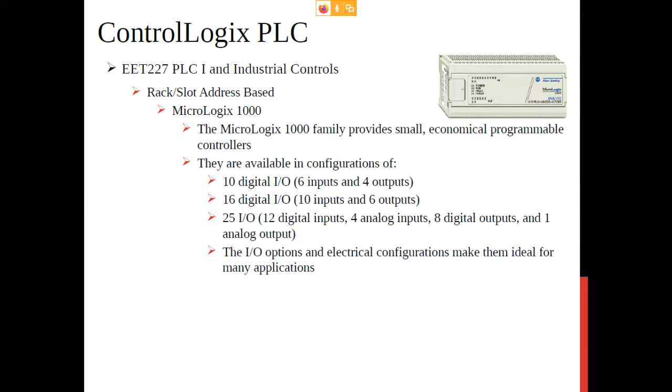And the other thing is, they actually used a rack slot sort of address spacing on them. Okay, and the MicroLogix were just like rack 0 because you couldn't add a rack to those. The SLC 500s, a lot of times people called that the Slick 500, and I don't know what happened to my image up there, but those processors were kind of like the core Allen Bradley before they moved to the ControlLogix model, but they also used a slot referencing.

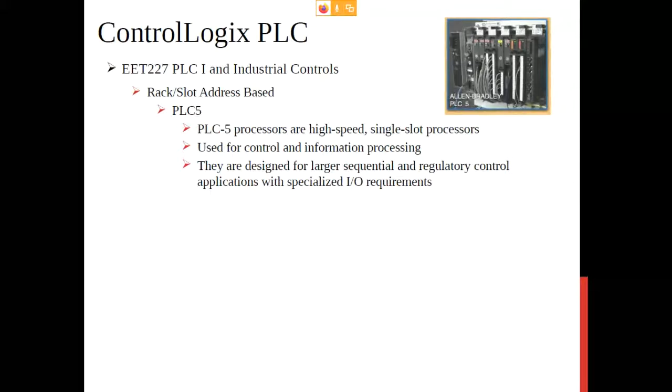Okay, and then the PLC5 was a really old style. They used a rack and slot address spacing. But some of these are still in use. The PLC5 model was late 80s, early 90s kind of time frame when they were new. But once you put something in place and it's working and it's making money, you don't change it, right? You don't change a production line just because somebody made a brand new PLC. If the line's still running and it's still making money, you're not going to shut it down, because anytime you shut down the line, now you're losing money you could be making. So there are a few of these still around and still in production.

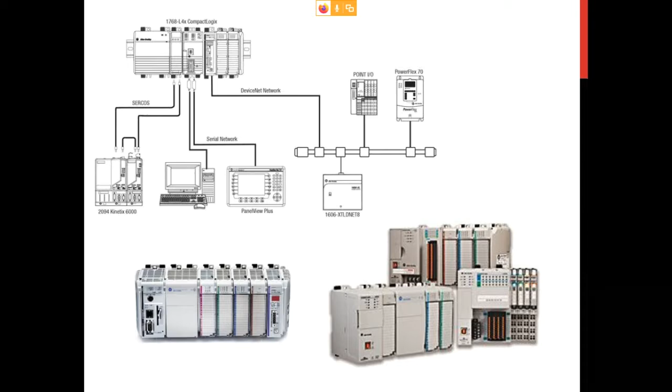Now the CompactLogix, which you used in PLC1, along with the ControlLogix, which we're going to also work a little bit with this semester, these use what's called tag-based. So you create a tag, and you assign that tag to the I/O on there. All right, and so these are expandable. So you can add modules to them, and of course we have 2 modules on the ones that we have in the classroom.

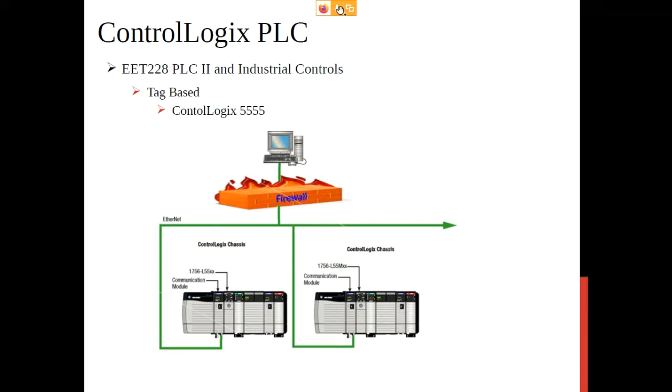All right, the ControlLogix use a chassis called the 1756 chassis. The CompactLogix use a 1769 chassis, but the ControlLogix use a 1756 chassis. So this is the 1756 chassis here.

This is one we had in the classroom, and you can see there I kind of labeled the PLC, and then there's actually 4 slots that don't have anything in them. So next to the PLC there, we actually had 4 slots with nothing in them, and then there were some more slots there, and so this was actually a 17 slot chassis. Okay, so the ControlLogix come in different size chassis. I think I say that somewhere on here.

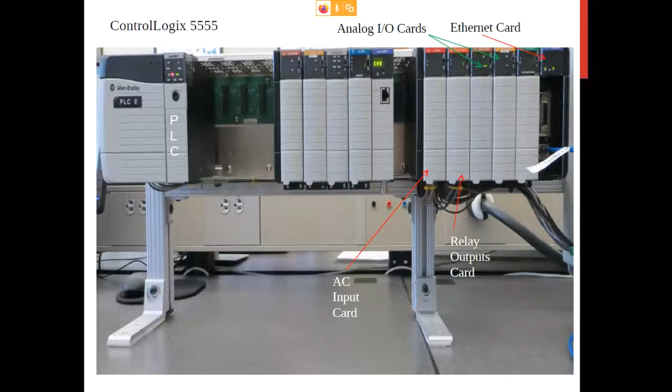We'll get to that, but they could do 4 slot, 7 slot, 10 slot, I think like 13 slot or 17 slot chassis. All right. Whereas the CompactLogix that we have in the classroom, you can only add, I think, 3 modules. We have 2 added, but I think they can only handle like 3 modules. Now, some of the other models of CompactLogix can handle more, but they certainly can't go all the way up to 17.

All right, so now when we communicate with these, of course, we're going to be using our standard Ethernet cables. We talked about those in the last lecture. If you're plugging from a laptop directly into the PLC, you need to use a crossover cable, which would have a 568A on one end and a 568B on the other. But if you're plugging the PLC into a switch and the PC into a switch, then the switch basically does the crossover for you.

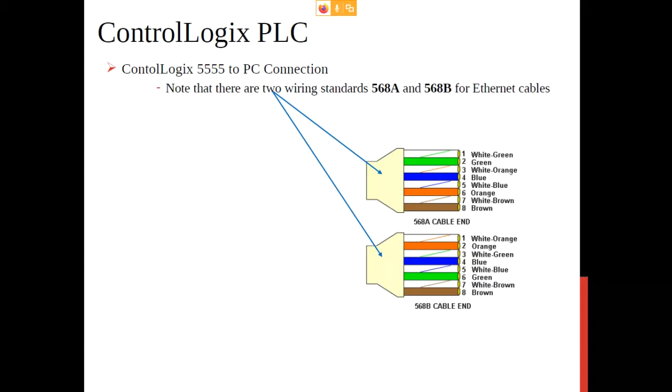So you would just use straight through cables. So you'd either have a 568A on both sides or a 568B on both sides. That would be a straight through. And again, the switch does the crossover for you. That's one of the things that it'll do.

All right, so to connect to the ControlLogix, and this is kind of a refresher because it's pretty much the same thing whether you're connecting to a CompactLogix or a ControlLogix. So when you open up the software here, if you open up RSLinx, since we're connecting across the Ethernet, there's 1 of 2 drivers we could use. One of them is called EtherNet/IP, for that industrial protocol we talked about in the last lecture. If you're on the same network, it works really well.

But our PCs are not on the same network that our PLCs are on. So we go to Communications, Configure Driver, and then we're going to choose Ethernet device, not EtherNet/IP. EtherNet/IP works really quick if you're on the exact same network, and then all the devices on that network just pop up, which is really nice. But for us, we're going to create an Ethernet device. I like to label mine the PLC network, because that's where the PLCs are at.

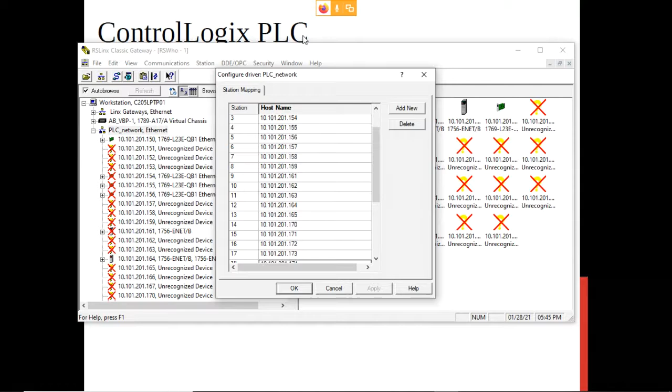And so if you look right now, you can see several of these are on here. Now to configure this driver, you come over here and say configure driver, and you can list all of the IPs in one shot. What I did was I did this ahead of time and added the IP of all of the CompactLogix PLCs and all of the ControlLogix PLCs, and I even have some other devices listed here. And so you can see these are just showing up here.

The ones that are green are actually plugged in. And the ones that are red, they're not plugged in or powered on, or they're not on this network, one of the three. So you can see here that this 150 is plugged in. This is a CompactLogix PLC, right? We can see that by looking at the backplane. Remember, I just said it's a 1769. That is the chassis of the CompactLogix model of PLCs.

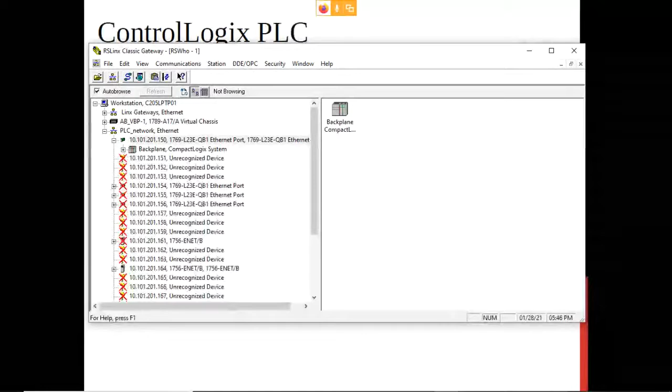What's nice about the RSLinx software here is that you can see what inputs and outputs are available. You can see there's the local bus adapter, but then there's 16 high-speed 24-volt DC inputs, and these are embedded into it. So we can't actually remove this. It's not a module that can be added or removed. It's embedded in there, but it's classified as module 1. And then there's a second module which has 16 24-volt DC outputs, which are sourcing outputs.

If you remember from PLC 1, if you have a sourcing output, the device you're outputting to needs to be a sinking device. If you have a sinking output, then the device you're connecting it to must be a source voltage. And the same for the inputs, you need to have either sinking or sourcing. But you notice this one doesn't say sinking or sourcing, and the reason for that is you get to choose that when you wire it up.

So when you wire up these inputs, you can wire them up as sourcing inputs, and then you would have to wire them into a sinking sensor. Or if you have sourcing sensors, then you would have to wire them up so that your PLC was a sinking device. Okay, so that's why it doesn't say source or sink on the inputs, because it's your choice based on how you wired the device up.

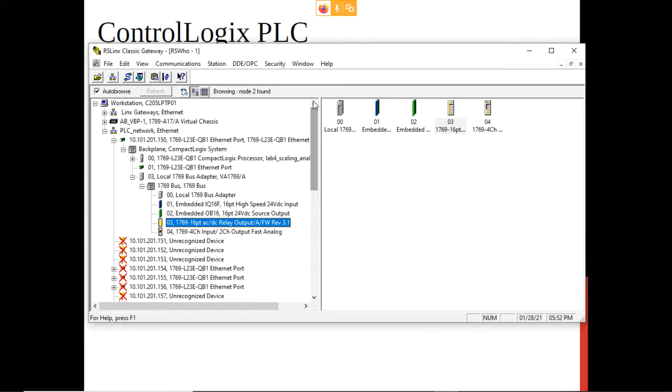Now, what I want to point out to you here, this is an OW16. And if we come back up and look at this guy, he had an OW16. I guess it didn't actually say OW16 there, but it is actually an OW16 relay card. But this one here is a 1769 module, so it won't plug into the ControlLogix. It plugs into a CompactLogix.

They're actually the exact same model as far as the circuitry, because they're both OW16s, but the way they plug in differs. This one plugs into the 1756 ControlLogix chassis. So even though they both have 16 relays and they're effectively identical as far as what they do, they're designed to plug into a different chassis.

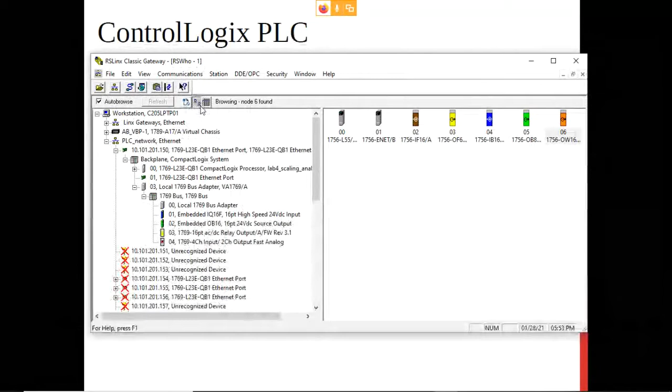All right, so we can see that again in this RSLinx software. And it's very helpful because when you go into the RSLogix 5000 software, okay, good, it activated this time. Last time I opened it, I wasn't connected to the network and it was giving me an error. Anyhow, when you open up RSLogix and you create a new program, see, the difference is this is our communication tool. So this sets up the communication between our PC and the PLCs, okay?

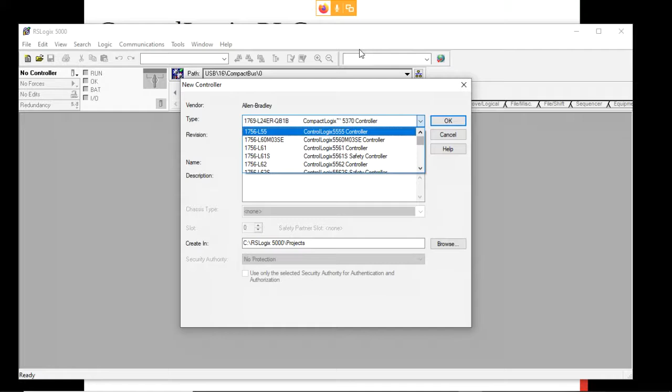RSLogix 5000, on the other hand, is programming software. And so if I come over here and say I'm going to create a new program, now I have to decide what controller am I going to write to. And so if I want to go to the L55, which is the ControlLogix, then you choose that. Now, if you do that, you notice we have currently installed 3 revisions, but 19 and 20 are grayed out. I can't select those, because the ControlLogix don't use those revisions.

And so if you have to install the software on your laptop or your desktop computer and you're trying to install RSLogix 5000, you need to know which revision or revisions you're going to be using. Our ControlLogix controllers are actually a little bit on the older side, and they only use version 16. Now, they do have newer ControlLogix controllers out there. We just don't have them in the classroom. So the ones that we have in the classroom only work with revision 16. That's the L55. One of our ControlLogix is an L61. So it's a little bit newer than the 55, but it still uses revision 16.

All right, and then we would create a name for this. Not sure what name to create here. I'll just call it ControlLogix example. And then you can put in a description. It's a really good idea to put in a description here of what your program is for. But this is what I wanted to show you here. See, here are your different choices. So you can get a 1756 4 slot, 7 slot, 10 slot, 13. I think I said 14. It's a 13 slot and a 17 slot. They also have kind of a special one, which is called the XT chassis, that you could purchase.

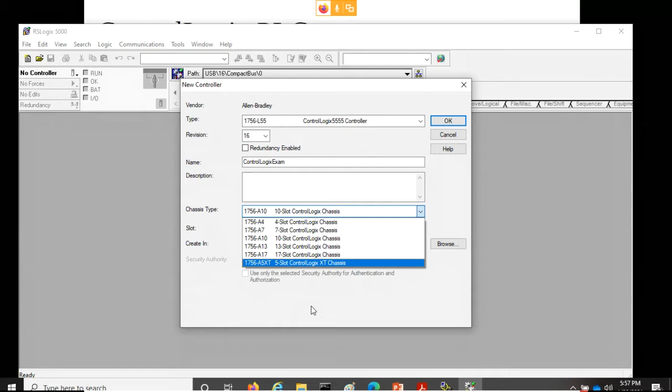Now, in the classroom, we used to have all 17 slots, but as you saw from that one picture, we weren't using half of the slots. And so we actually ended up getting 7 slot chassis. So we have 7 slot chassis, and we have one that's a 10 slot chassis. So you have to look at the one that you have and see which slot it is. Now, you can either look at the chassis, look at the PLC and count, or you can also look at RSLinx, because it's already communicating with it. And so I can clearly see here I've got 7 slots. I got the PLC in slot 0, and then I got 6 more slots. So I'm using the 7 slot chassis, so I'm going to choose the 7 slot chassis here.

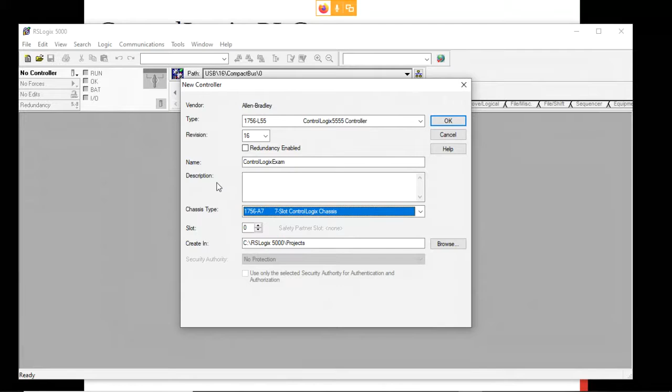And then I need to know, where is the PLC? Is the PLC in slot 0, slot 1, slot 2? You've got to know that. Again, you can look at RSLinx or look at the actual PLC and figure that out. It's visible. But when you put it in here, you need to tell it, hey, my PLC is in slot 1 or slot 0. In the classroom, they should all be slot 0.

And then you can decide where to put your files. Now, it likes to put it on the C drive. Do not put files or programs on the C drive. You will lose them, because they reboot those computers at midnight every day, and anything on the C drive is wiped. So make sure you put it on the D drive or some other drive, okay? For me, I'm actually using a laptop right now. I'm not in the classroom. So I can put it in here in the users, or I could browse. You could put it on a flash drive if you wanted. Okay, and I'll just put it in here and create that.

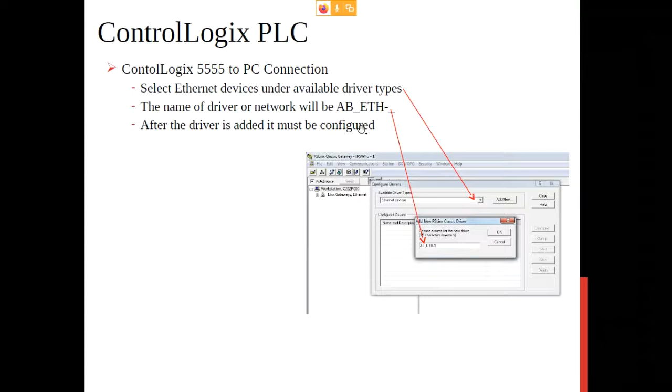I think these slides pretty much show you what I just showed you in RSLogix here. Let me see if I left anything out. Okay, so when you create names, try to be descriptive and say, what is this? So lab 1 is like analog signals. Don't just call it lab 1 or test 1. Those are just horrible, horrible names. You need to make it descriptive so that you have an idea of what it is. So when you come back later, if you decide you want to open it, you have a better idea before you waste time opening it.

All right, so while that was going there then, not sure why it's bleeping at me here.

Okay, so here it's opened up now. RSLogix has opened up, and it's got the controller here. Now notice when you come up to the very top of this tree here, you can go to properties and you can see the controller that you selected, and you can change that. So if you selected the wrong one, you can change your controller. Or if you chose the wrong chassis, you can change it.

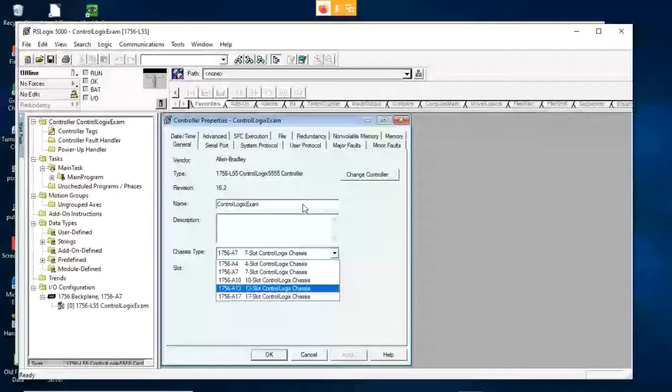Or if you got the controller in the wrong slot, you can change that also. So you can change these after the fact. The other thing is that you come over here, you see faults. So one way to get a guaranteed fault would be if, under general, you selected the 4 slot or the 13 slot chassis or something like that, and you only have the 7 slot, and then you try to download it, it's going to fault.

So what do you do? You come over here to fault, and it'll show you some information about the fault, and then you click on clear major faults, and clear that fault. If you don't clear your fault, that PLC is not going to work. There'll be a little red light on the PLC indicating fault, and you must clear that before you can do anything else with that PLC.

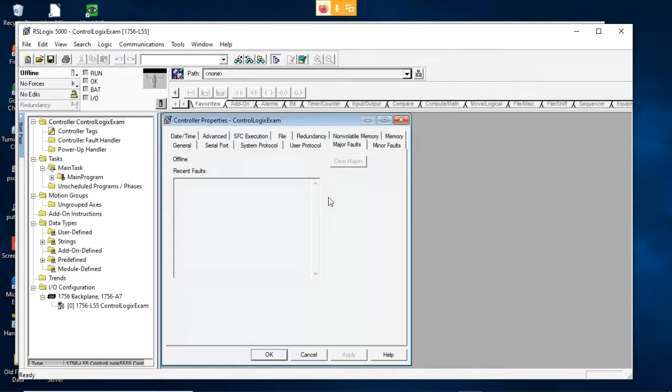So you have to come over here and go online, and then when you're online, you can clear the fault. See, right now it's grayed out because I'm not online. Another way to get a guaranteed fault would be to add a module. So remember down here in IO configuration, we can add our new modules. So I can go to my digital modules and choose that 1756-OW16, which I showed you we have installed. You can add that.

When I add that, it's going to ask me what slot to put it in. And if I put it in the wrong slot, that's another guaranteed fault. So you need to make sure that you select the right slot. How do I find the correct slot? Again, we flip back to RSLinx, and I look and see where's my OW16. It's in slot 6. So I come over here and I set this to slot 6. And this is a relay module, so I can type in relay.

Now, one other thing, please make note of this. If you've got a piece of paper handy, make a note of this so that when you are doing the ControlLogix PLC lab, you must disable keying. I haven't tested this, but I think the problem is, if you look at this, it says revision 3. These IO modules have firmware in them, and if the revision doesn't match, then you will get an error.

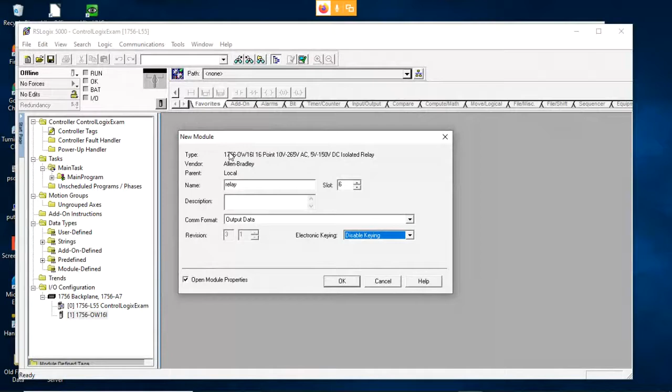Now, again, if you come over here to RSLinx and right click on this and go to device properties, it will tell you that this is revision 2, major revision 2, minor revision 1. But when I selected this, it's at revision 3.1. I'm just going to cancel this and re-add it. So right click on IO config, new module, and relay modules, OW16, are digital modules, so I'm going to look under digital, and say okay here.

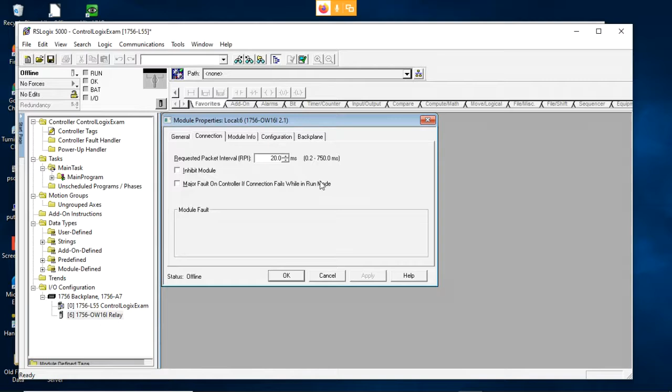And see, now I could have selected the revision here and made it revision 2. And if that's okay, then I probably don't have to disable keying. But if you select the wrong revision, you can still get it to work if you disable the keying, and it'll work fine for our purposes. And remember, that is slot 6. So this is my relay module with 16 relays, and we can then add that. There's not a whole lot of configuration here. Normally we don't have to mess with this module.

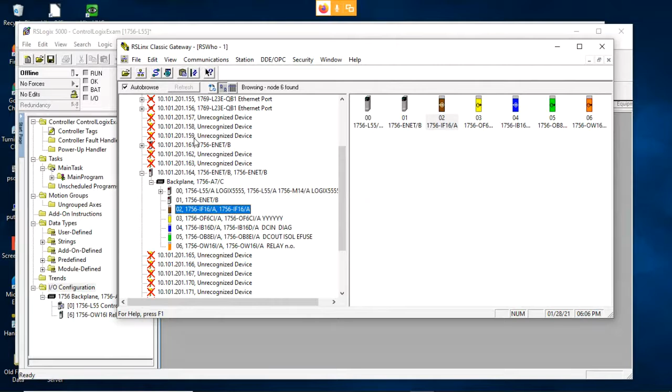All right, but if we wanted to add an analog card, so we're going to add an analog card. Let's go back to RSLinx, and we see, as I already pointed out, slot 2 has an IF16 card. And again, if we do a right click on this and look at device properties, we can see it's actually only revision 1 on there. So it's revision 1,

minor revision 5. So if I come over here, I'm going to say new module, and I'm going to look for an analog card. So I'm going to expand the analog, and I want IF16. And so this is going to be analog input, and it's in slot 2, and it's revision 1, minor revision 5.

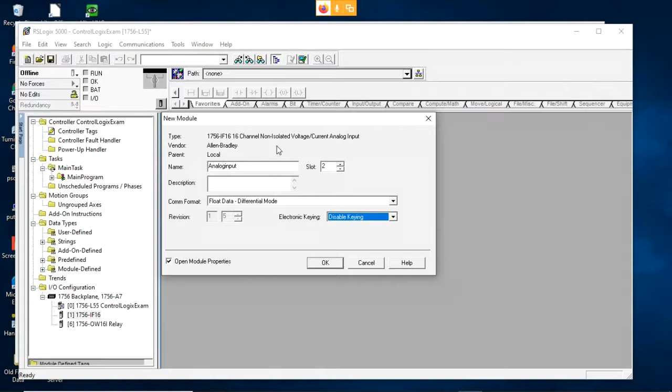So if I take the time to select those, then I probably don't have to worry about disable keying. But I've never actually tried that. But if you're having any problems, make sure you just disable keying and you'll be fine. Now, the other thing I want to point out about this analog module is we talked about inputs and outputs. We talked about binary numbers last week.

And if you choose integer data, then it's going to convert the data as simply integers. But if you choose floating point values, it will actually allow you to kind of scale it on the fly, which is kind of nice about the ControlLogix. The CompactLogix will not let you do that. So these give you a lot more choices. You can select either single-ended mode or differential mode, and I'll come back to those in the slides in a little while.

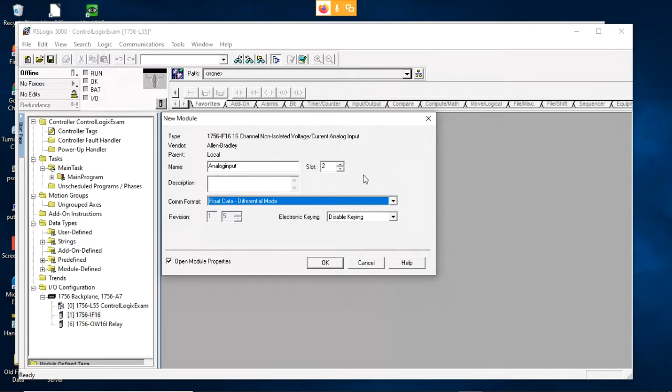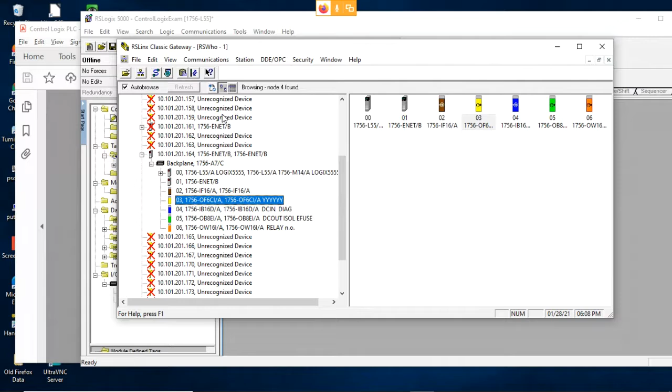So I'm just going to cancel that for right now. But that's how we add inputs and outputs to our PLC. And the reason we have to add them here, if you look at RSLinx, you're like, oh, it knows what I have. No problem, right? It knows that the PLC is in slot 0 and the Ethernet is in slot 1 and the analog input is in slot 2 and the analog output. It knows this because it's talking to the PLC.

But at this point in RSLogix 5000, we're not actually talking to a PLC. So if we come over here and click on Who Active, it looks like a little network thing. And then we can browse our PLC network and connect to that PLC. And so we want to drill down. You need to talk to the PLC. You see how everything over here on the right is grayed? Upload and download, go online and update firmware. Those are all grayed out because I haven't got to the PLC.

When I choose slot 0, now it knows that I'm actually communicating with an actual PLC. And so I select the actual PLC, and then I can download my program. Now at this point, I actually haven't created a program, so it's a null program.

Now I want to make a point here. On the newer PLCs, you don't actually drill all the way down to the PLC. You just choose the main IP here and you're good. So it depends on which model you're working with. If you're working with the ones that we currently have in the classroom, you have to drill down to the PLC. But if you're watching this video and you actually have a newer version of the PLC, you just select the IP address and you're good to go.

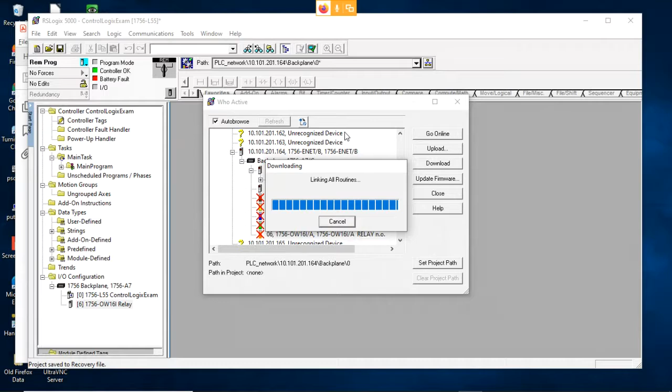Now download means that you're taking the program from your PC or your laptop and you're putting it into the PLC. Upload means you're taking whatever program was currently in the PLC and bringing it up to be able to view it and modify it in the PC or the laptop that you're communicating with.

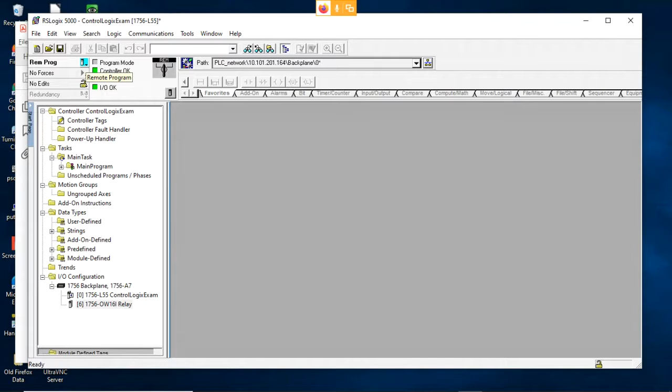All right. Now, the other thing to notice is over here, it says remote program. It's kind of a cyan color. So I downloaded the program, but my PLC is in program mode. That means it's not actually running. It's just sitting there. So if I want to run it, I click on this little down arrow here at the cyan color and come over to run. And then I can change it to run, and it says remote run, meaning that I executed it remotely. And then you can see that it has turned green here.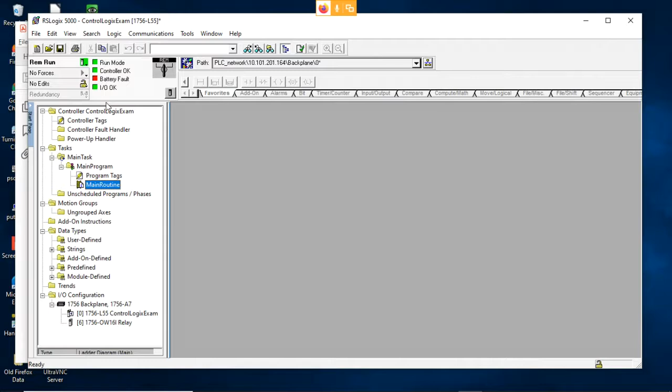And so the PLC is actually running the program. Now again, if we come look at my program, there's nothing there. It's actually not running anything. There's no code there to run, but it's online, and I can actually go back to program mode if I want now. If it was running a program and you switch it back to program mode, that will stop it from executing any program that it might have been executing.

All right, now that I'm online, I'm still communicating. I want to pop back up here to the controller configuration and show you that now I can't change the slot or the chassis because I'm live online. But if I come over here to major faults, if I had a major fault, I could clear it. And if I had a minor fault, which actually I do have, which is because my battery is dead. The PLCs have these batteries in them so that, if they lose power, they won't forget whatever program you just downloaded to them.

So you can see that I do have a battery fault on these. We don't worry about it in the classroom because we're just going to be downloading a new program anyhow, so it doesn't matter whether they remember it when you shut it off. One of these days, I do hope to update the batteries, but we just haven't made it a high priority.

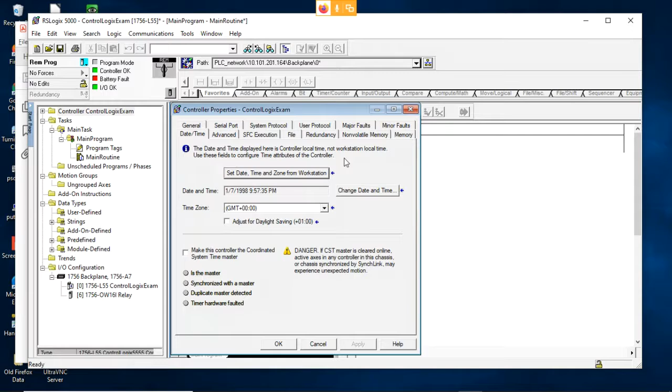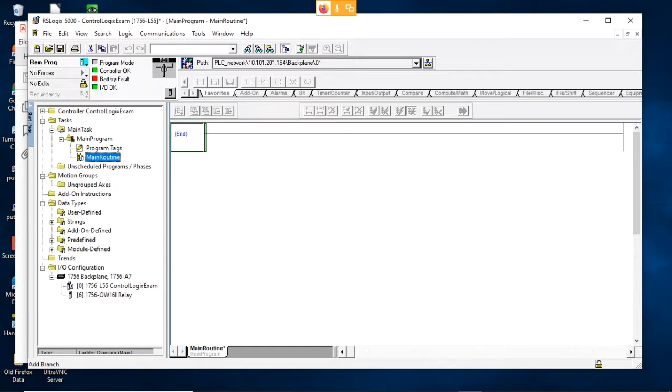You can also set the date and time on the PLC and set some other configuration in here. Now, it doesn't do us any good to do that because the battery's dead, so once you unplug it, time would be lost anyhow. But once we get our batteries corrected, then we can come in here and set the date and time for the PLC and run that. All right. So that's just some general configuration for the ControlLogix.

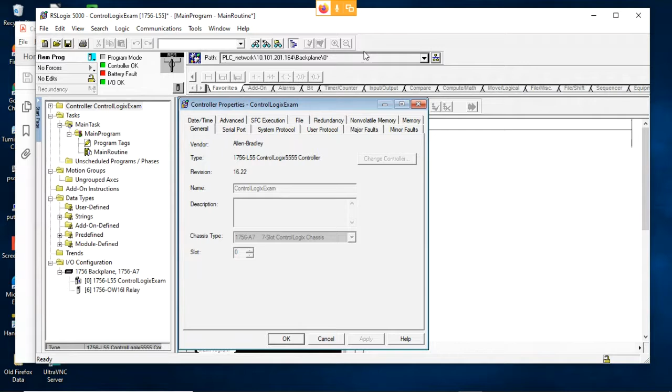Again, it's practically identical to what you were doing for the CompactLogix, but there are a few differences as far as your modules. You have to add all the modules because you don't have any embedded modules. Now, I don't think these guys do it, but some of the newer PLCs, once you connect to them and go online, will actually be able to pull in all the modules that you have. So version 16 doesn't do that, but I believe version 20 does.

I'm going to go ahead and connect to the CompactLogix. So I'm going to come over here now and go to the CompactLogix 1769. And the one that we have is the L23E QB1. I'm going to select version 20 for that because that's the version of firmware that they are set to, so you need to make sure you match that. And so this is just going to be the CompactLogix, and it's going to create the program here.

And then once it comes up, I'm going to connect to the CompactLogix I have turned on, and I'm going to see if it can pick up the I/O. I'm pretty sure that version 20 would grab the I/O. I definitely know with some of the newest versions, you just have to go online and communicate with the PLC.

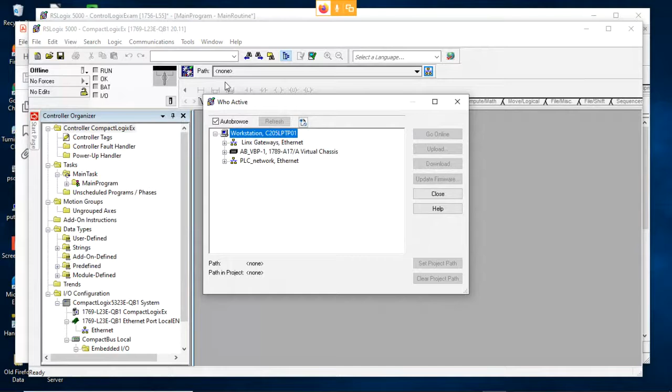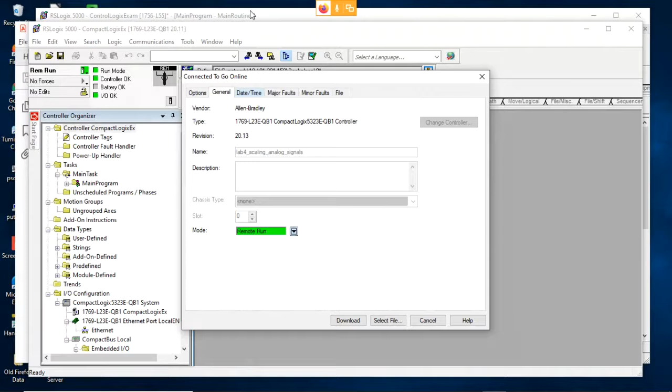Okay, so right here, I'm going to select my CompactLogix. Now again, with this version, I still have to go down to the actual PLC, which is module 0 or slot 0. And then I'm just going to say go online. I'm not going to upload or download, I'm just going to talk to the PLC. And you can see here now that this guy's actually currently running a program. And so it's actually asking me to select a file here.

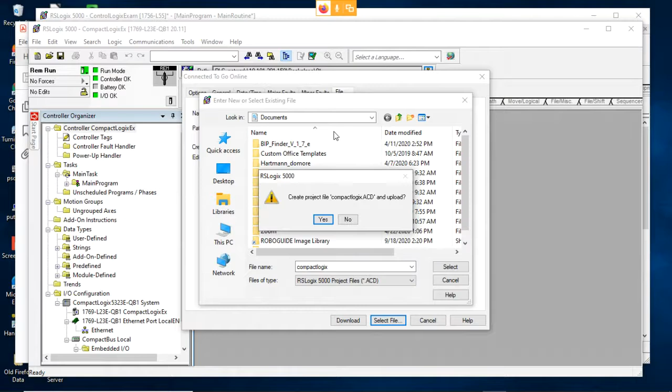And so it's actually going to be uploading the file. Okay, even though I didn't select upload, I just said go online. The first time you connect, you have to really choose either upload or download. And since I didn't select either, it gave me the choice to either hit the download button there or to upload the file that it's currently running.

And so then you can see what... okay, but yeah, here's what I wanted to show you on this. Once you're online with version 20 here, you can actually say discover modules. And so this one will then go through there and scan the modules.

Okay, it's not doing it at the moment, but usually it'll, maybe I probably have to be in program mode or something, but it can actually go in and scan and identify the modules for you on the newer versions, which is kind of nice.

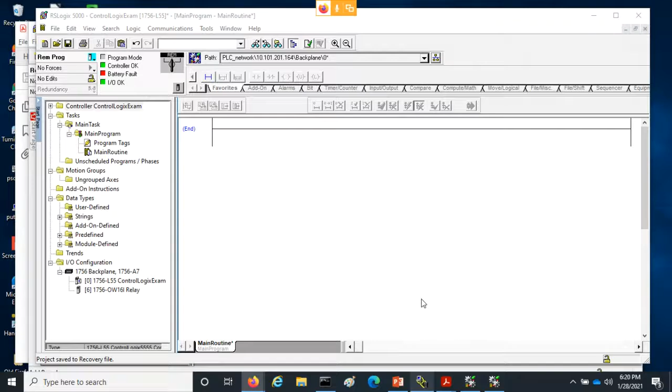Right, but again, we can always flip over to the RSLogix, and the RSLogix is communicating with it, and it will show us what those modules are. Okay.

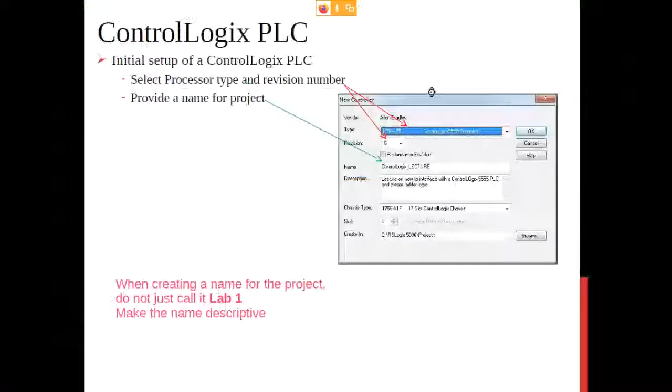All right, so let me flip back to the slides here. This was the slides for the ControlLogix, and I think I pretty much discussed everything that was in here. I'm just going to flip through here real quick. Take your time and review these again, but I'm just discussing the different things.

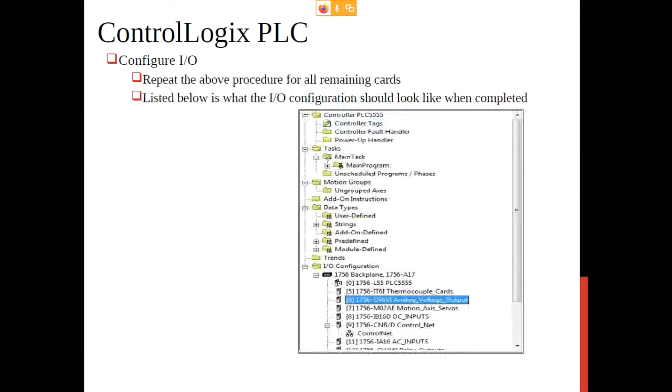So again, remember the electronic keying. You either have to set your revisions to match what the revision is on the actual card, or you can just kind of cheat and disable your electronic keying. So in the classroom, we just normally disable it and don't worry about it. But the electronic keying is important when you set up faults. We don't do a whole lot of that in this class,

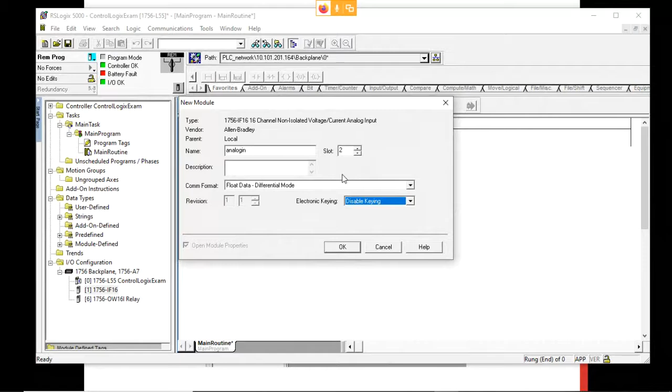but especially when you look at analog inputs and outputs, if I was to come in here and add my analog module, and this was slot 2, I'm just going to disable my keying here, and I'm going to select this, and they're warning you that, yeah, I don't know if you want to disable that. That's what they're saying here, okay?

But of course, now, when you look at this, there's a lot of configuration going on in here. One of the things that we don't really mess with too much in this class because of time, especially for analog modules, they actually have all kinds of built-in fault checking. So your program can address what happens if the voltage goes too high or too low, and you can set what a high or low means.

Okay, so remember, right now channel 0 is set for an analog signal to be between minus 10 volts to plus 10 volts. But we can say, you know what, if the sensor gets above 8 volts, I want you to spit out an error, an alarm. I want an alarm. I want to know. And so you can build that into your program.

All right. And that's when we come back over here and look at the revision. That's when the revision is very, very important, because the alarms and things like that maybe aren't supported in one revision or another, or they made a change. And the other thing is also you can do calibration, to make sure that it's calibrated to your sensors.

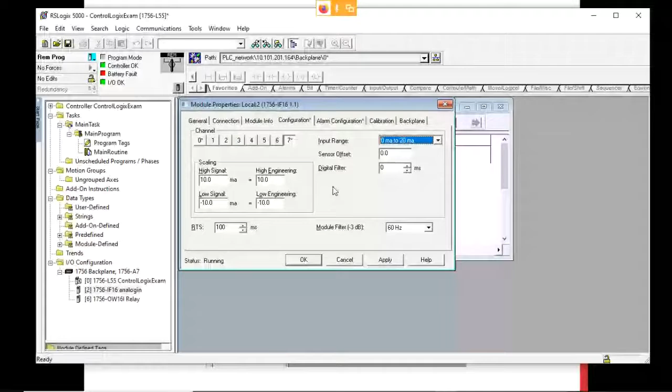All right, now this is the ControlLogix, but if I go over and look at the CompactLogix, I get the same sort of thing. So if I come look at this configuration in the CompactLogix, you not only have to choose what signal you're getting, but you actually have to click on enable. And this is very common in the classroom. People are like, it's not working, and I'm like, pull up your configuration, and sure enough, you didn't even enable it. So if you haven't enabled it, it's not going to work. So you have to enable it.

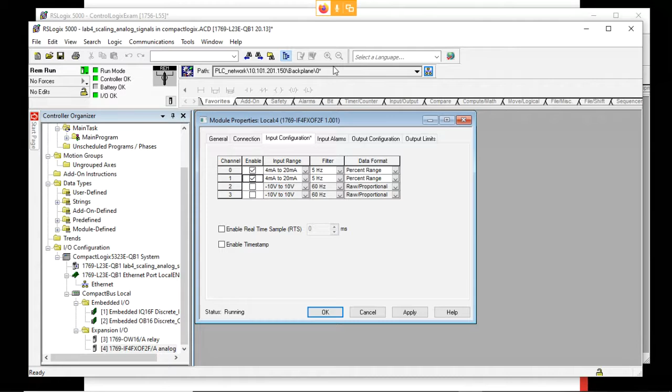Now the CompactLogix card, we actually have one analog card that has 4 analog inputs and 2 analog outputs, both in the same module. So that's why when you read this, you see IF4, that means 4 inputs, and OF2 means 2 outputs. So it actually tells you that right in there. So if you want to use an output, you've got to enable the output. If you want to use an input, you have to enable it, and you have to select whether it's going to be a voltage input or a current input.

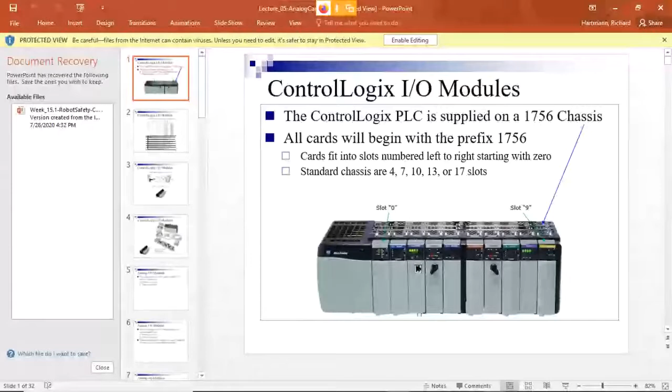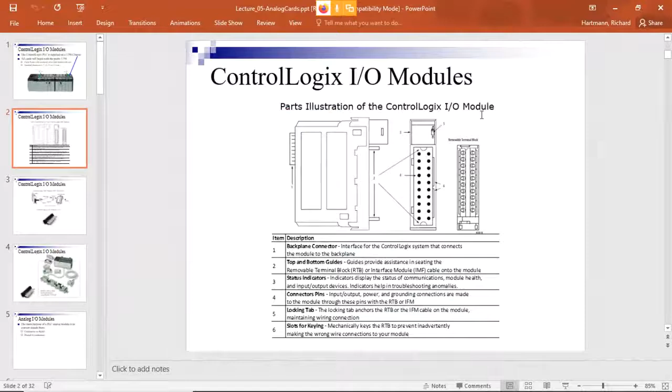All right, so when we look at these modules, I'm just going to kind of go through the slides here. Again, the ControlLogix are 1756s, and we can have 4, 7, 10, 13, or 17 slots in it. And a couple other things to note about these. One of the things that is really cool about the ControlLogix, which you can't do with the CompactLogix, is these things are hot swappable.

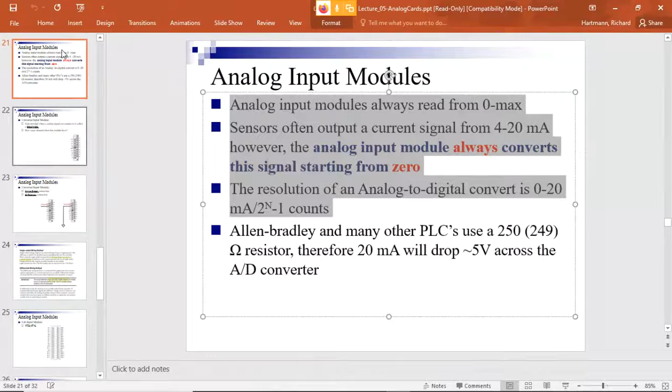I've jumped ahead here. I'm sorry, I know it's in here somewhere. I forget the exact word they use, but it's an acronym, removable under power. Maybe it's in the other set of slides, but it's removable under power. It's like RIUP or something like that is the term that they use. I know I have it in the slides here somewhere.

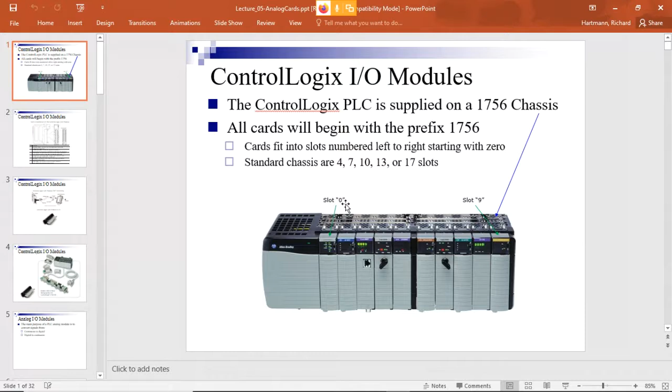This RIUP, I believe, is the way it's spelled, but it means that you can remove it under power. So the beauty about that is that if one of these I/O cards goes bad, you can just pull out the card and plug in a new one. And what's really nice about that, you see this here is a little plastic terminal strip. This little gray piece is the door. You open up the door and it becomes a handle. And you pull this off, and then you can pull out the I/O module without shutting off power.

So that means that you can plug in a new one. So you plug in the new module, push the terminal block back in, and you're back up and running in way less than a minute. Okay, so if the module goes bad, you don't have to shut off anything. You just pop off this terminal strip, slip out the module, pop in the new module, and then push it back. You don't have to disconnect any wires.

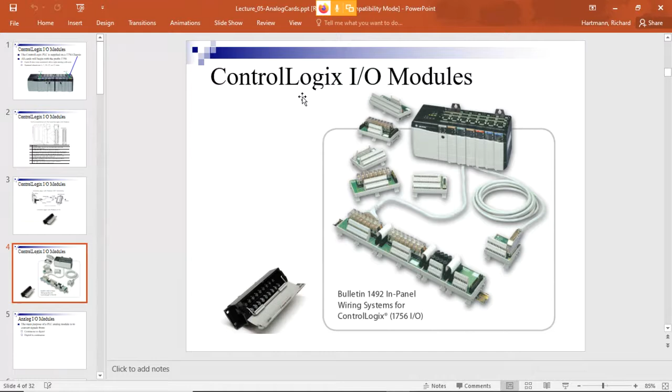You don't have to shut her off or anything. So it's really, really nice for replacing a module. Okay? So it has very minor interruption to the line. You don't have to shut down the line. You just pop that out.

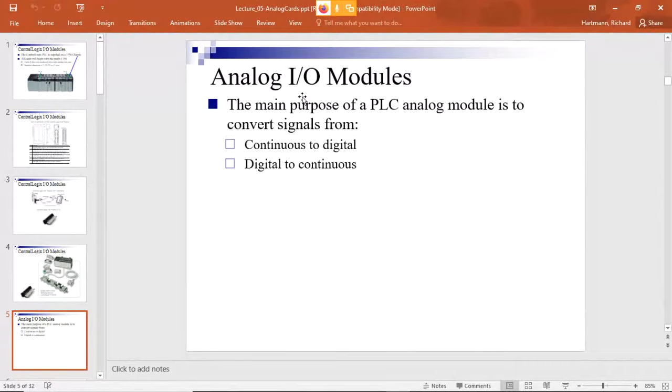All right, so let's look at I/O modules here. So when we have an I/O module for analog cards, we have either analog to digital or digital to analog. So we use the acronym ADC, which means analog to digital converter. Okay, so this would be the analog input card. And outputs are referred to as DACs, digital to analog converters.

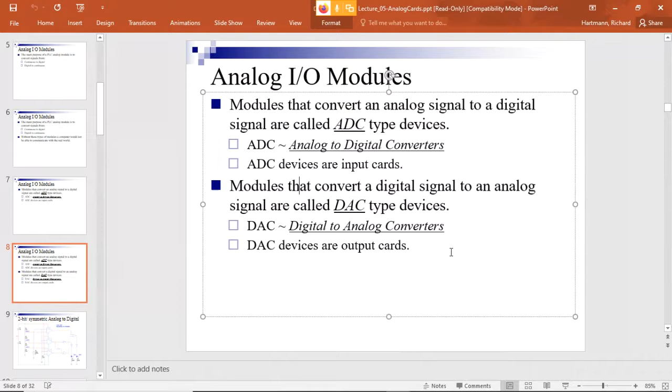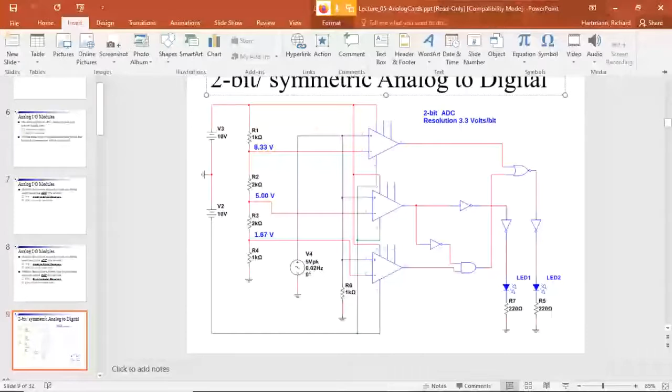All right, so this is a 2-bit converter, and I'm going to have 4 values. So I only have 4 possible values in here. The 4 possible values I have are 0, 0.

I hate it when it gives me a white font. Like, really? Why would I want a white font?

So I have 0, 0, which means that I'm at 0 volts. I have 0, 1, which means... well, the 0, 0 means I'm somewhere between 0 volts up to 1.6665 volts, somewhere in there.

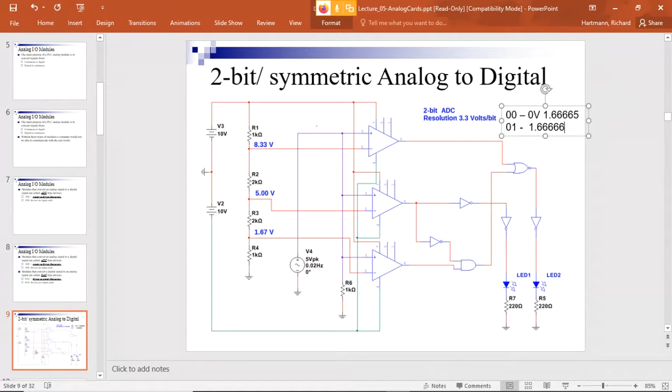And then if I have 0, 1, that's telling me I'm at 1.66666 volts up to 4.999999 volts. And then if I have 1, 0 in binary, which is 2 in decimal, that tells me I have a voltage of 5.00 volts up to 8.3332 volts.

And if I have 1, 1, that means I have a voltage anywhere from 8.33333 volts up to 10 volts, which is the maximum. Okay, so this particular analog to digital converter is a 10 volt converter. It doesn't do minus 10 to plus 10, it just does 0 to 10 volts. That's all this one will do.

All right, but see, these are the values. So if I have 0, 0, then that's telling me that I've got a voltage somewhere between 0 to 1.66 whatever volts. So I'm below 1.6666666. If I have 0, 1, it tells me I'm at either 1.6666 all the way up to 4.999999. If I have 1, 0, it tells me I broke 5. I hit 5, that's the threshold. But I could have 6 volts, 7 volts, all the way up to 8.33332 volts.

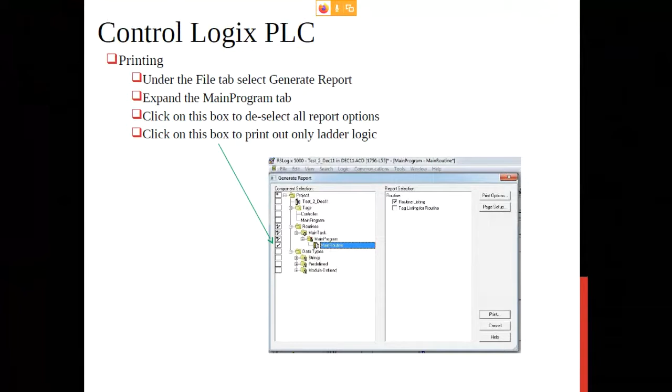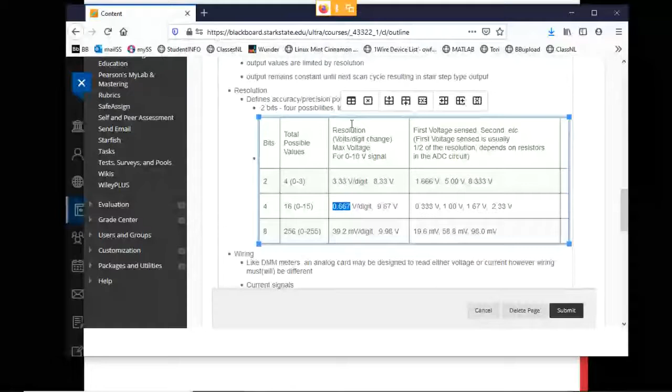If you have 4 bits, and we're going from between 0 to 10 volts in this example, and you can apply the same logic to a current signal, so if you have 4 bits, that means you've got 16 possibilities, which means that you can detect a voltage change of 0.667 volts.

And the maximum voltage you could detect then, instead of being 8.3 volts for a 2-bit, is 9.67 volts. And so the first voltage you could detect would be 1/3 of a volt. But you're going up by 2/3 of a volt. So the next one you would detect would be 1 volt, and then 1.67 volts. Technically the 6 just goes on and on there.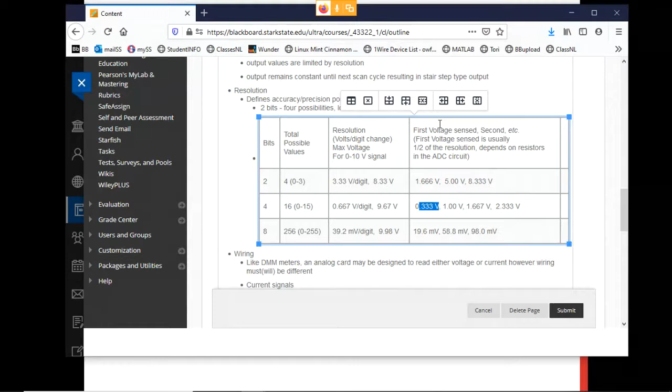But if you have an 8-bit, an 8-bit gives you 256 unique possibilities, which means you can detect 39.2 millivolts. So you can detect a change of 39.2 millivolts. And the maximum voltage you would be able to detect is about 9.98 volts. So the first voltage you would detect is half of this. Notice the first voltage you can detect is half of the resolution.

Okay, don't worry, I'll have lots on the quizzes and exams and things. So if you don't have any, that's great.

They also make dedicated analog input modules for certain types of sensors, like for thermocouples. We'll talk in more detail about those later on, but thermocouples are used to measure temperatures. And so you can buy an analog input module that is designed to read just one specific type of thermocouple.

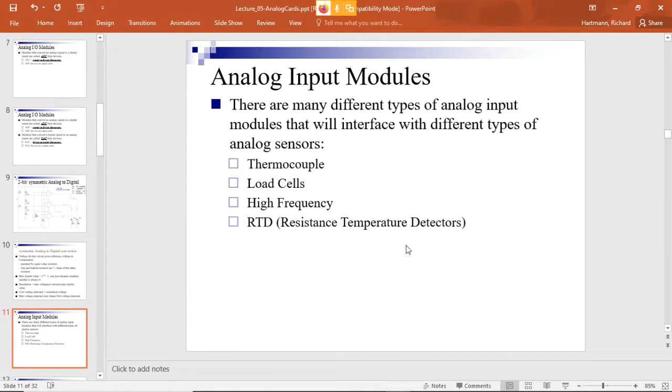But you can actually read 6 or 10 of those, so you can connect 6 or 10 or 12 or however many thermocouples into that one analog input. Normally they're actually a multiple of 2, so 2 or 4 or 8 or 16 or something like that. But they're not always multiples of 2. All right.

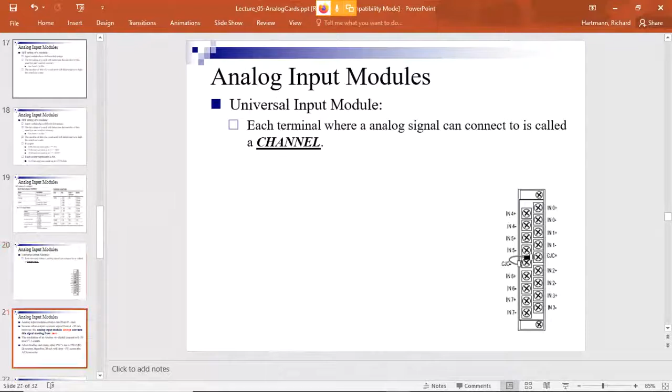Okay, so this is just kind of showing some of those analog modules. All right, now when you wire these things up, you can do either single-ended or differential. And again, I kind of showed you that configuration; you have to know how you wire it up, obviously. And then when you wire it up, you tell it in your configuration right here how you wired it up. Did I wire it up in differential mode, or did I wire it up single-ended?

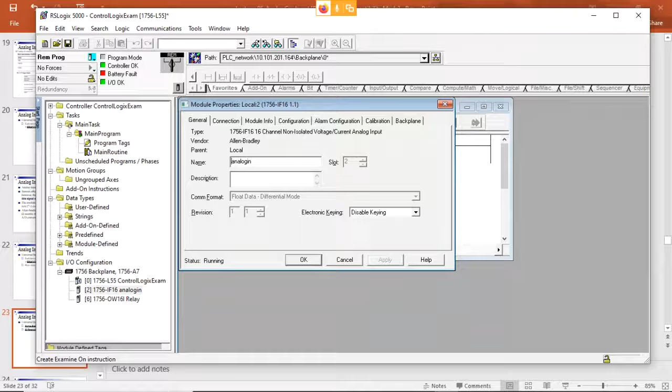All right. So if you wire it up single-ended, then you get full use of all 16 channels, or however many inputs that you have. If you wire it up in differential, you're giving up half of your inputs, but you don't have to share a common ground.

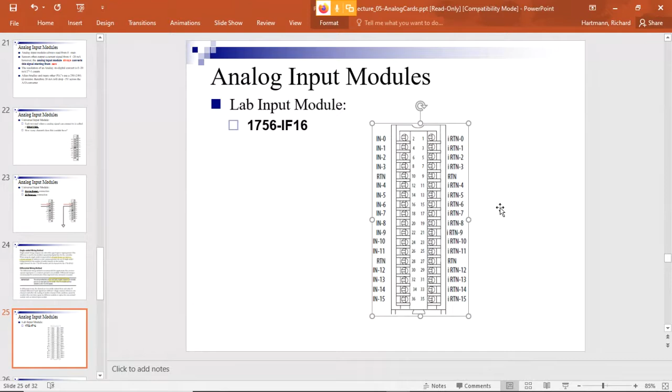All right. And so I kind of show you in here, this was the IF16 input module. And you see it actually has 36 terminals connected to it. Okay, so you have 36 terminals to wire up if you're going to use all 16 inputs. And so this is just right out of the manual here, and they show you how to wire it up if you're doing single-ended mode or if you're doing differential mode.

All right, and so the way you wire it changes depending on how you're using that. So you got to pay attention, read the manual. They're available online. You can download it and get that. But it makes a huge difference on how you wire it, whether you're using single-ended or differential.

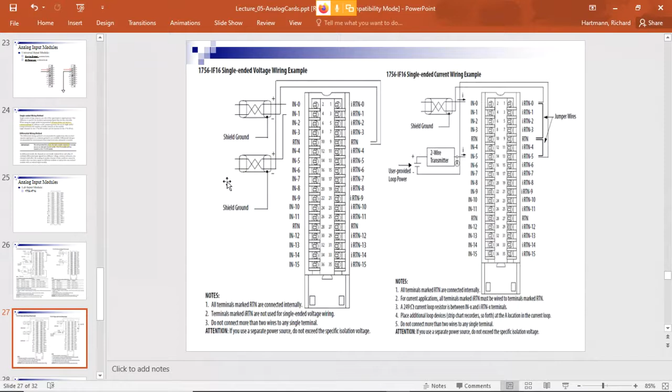Okay, so if you're doing current wiring here, notice you actually have to wire a jumper over here, because this is basically a current. If you're wiring in a current, you got to have the current flow. So that's why you have this little jumper here running from current return, I return 0, that has to then run over to RTN. Okay, but if you're doing a voltage wiring, the voltage wiring is on the left side here, and you don't have to have that return. Okay.

So you have to know, are you actually wiring it up for a voltage input or a current input? And yeah, it makes a lot of sense that, if it's a current signal, you've got to give that current a place to return to. And so there's extra wiring for that. It's just like if you were trying to hook up a current meter.

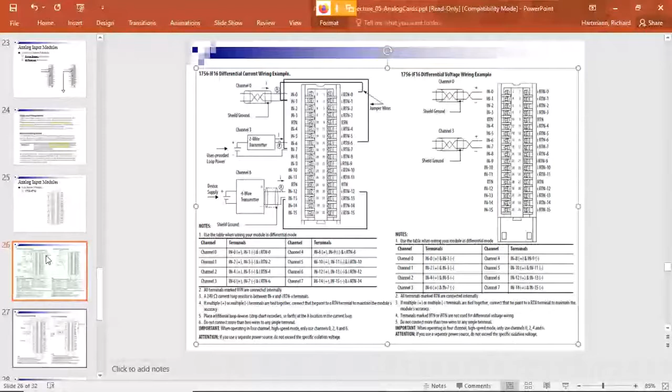Okay, if you're hooking up a current meter to measure current in an electrical circuit, you would wire that in series. But if you want to hook up a voltmeter, you just hook that in parallel, right? So when you wire them up, whether you're doing current signals or voltage signals, it's a different wiring, just like with a DMM. You have to wire it differently for the different type of signal. All right, and so those are in here. You can review that, okay?

The other piece is for output. So remember, the OF6CI is our output card that we have on our ControlLogix. And when you drive a load, they have two different wirings depending on how much resistance is in your load. So if your load is 500 ohms or below, then you wire it up to these connections. But if your load is, this really should say 500 here. I need to save this and re-upload this set of slides because I made a couple changes.

If you're 501 ohms up to 1,000 ohms, then you wire it up to this alternate output. Okay. So you have to know what your load is, and of course you're going to have documentation on whatever your load is. If you're driving a relay or whatever, you need to know what the resistance of that relay is. Or actually, relays are digital. Sorry, yeah, relays are digital. This is analog.

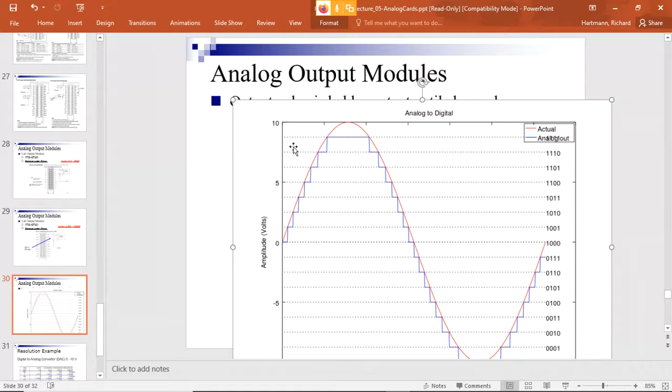the thing is that you're not going to be outputting all the time. So what happens is you're going to put in the output and then you got to wait for the next scan cycle before you output the new value. So you end up actually getting this kind of stair-step output, because it's only going to change at the next scan.

All right, and so that's due to the fact that you're running through the code, you read the inputs. Remember what a scan is. You read the inputs, you execute the ladder logic, and then there's also some kind of system management stuff that's happening there, and then you send the outputs. And so instead of getting a nice smooth curve, you end up getting a stair-step sort of output, okay?

Now, this is for a 4-bit output, so you can see the binary values changing there as we send the output. But if you had a 32-bit output and you had a faster thing, then it might be a little bit smoother. But you're still going to have a stepping sort of change at every scan. Okay, and it could be drastic.

I mean, this is actually showing fairly nice, smooth steps, but in reality, your scan maybe decides that it's going to make a huge jump. And so the next one could be a huge jump and not a nice, smooth thing. In this case, I was trying to output a nice smooth sine wave, and so that's what I'm getting. All right, so I'm getting this relatively smooth stair-step action going on here.

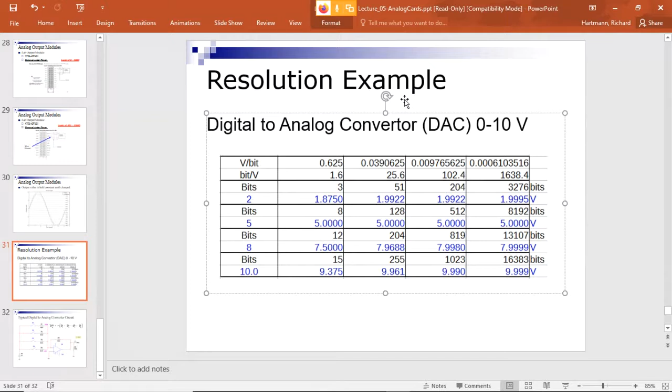All right, this is just kind of an example of the resolution of your digital to analog output converter, whether it's a 2-bit or a 5-bit, 8-bit converter, and what those values would be. Okay, so just like we did with the analog. And this is what the circuitry looks like for a digital to analog output. So this is a 4-bit output.

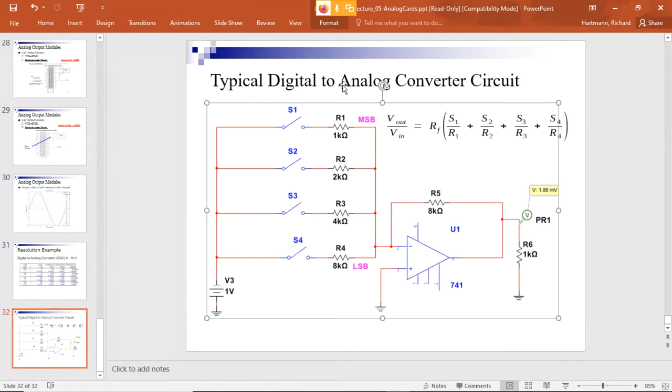And so when you notice this, I've got 4 switches or ones and zeros, right? So if it's 1, 1, 1, 1, that means all of these are closed, and I'm sending out my max output. But notice here, the most significant bit is 1K, and then the next one is 2K, 4K, and 8K. Well, if you remember, we were talking about binary, right? And we had that breakdown of binary, and we had those values.

Let's see, I was gonna, if we had like 128, again, it's white. Why does it default to white?

Okay, so we had like 128, and then we had 64, and then 32, and then 16, and then 8, and then 4, and then 2, and then 1. All right, so notice the values of these resistances here. Okay, this is a 4-bit converter, so it's 1, 2, 4, and 8.

So if you wanted to make it a 5-bit converter, you would have to add a 16K ohm resistor down there with the next switch. And if you wanted a 6-bit, you would have to add a 32 kilo ohm resistor. And if you wanted to make it an 8-bit, you would have to add the 64 and the 128. Okay? And so the only thing you would be changing is you'd be adding another switch and then another resistor here. And the resistor values would just be these binary values. So 1, 2, 4, 8, 16, 32.

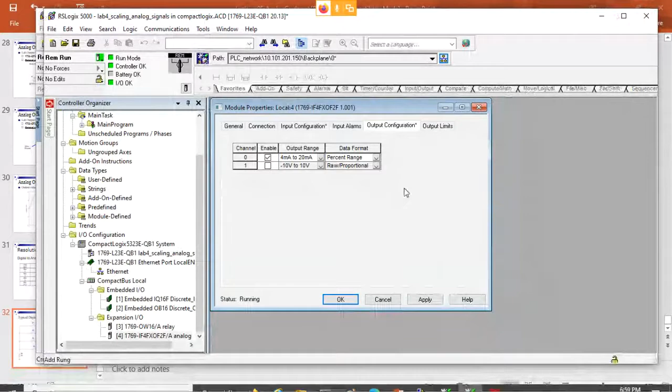Okay. Now this one's real simple. We don't have the alarms and things built into it. So when you think about the CompactLogix one, right? Remember they have all kinds of alarm circuitry built in there and calibration circuitry. So there's a lot more going on in these modules that you would buy from Allen Bradley or Siemens or whoever built your PLC than this little circuit here.

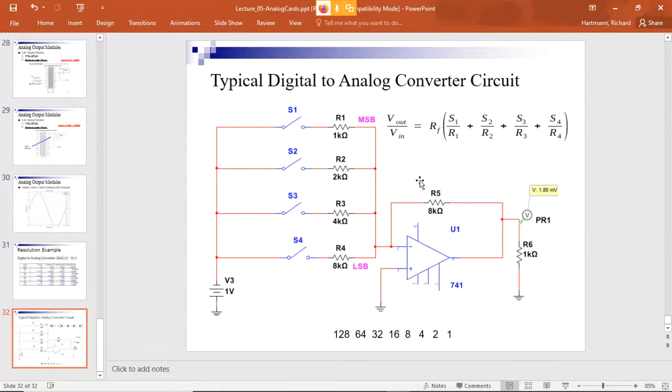Okay, but this is just a very simple one that you could actually just kind of build yourself if you wanted. But this is what it could look like.